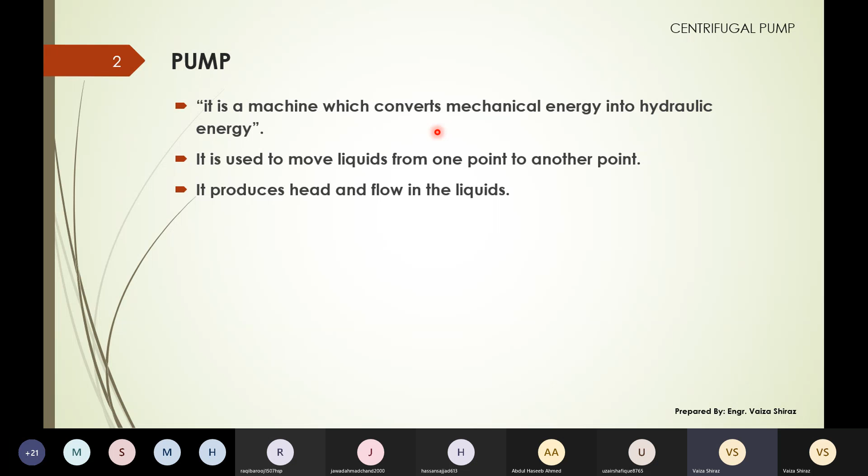So in that case you have to induce hydraulic energy in the water, and that is the main function of the pump. Now you have different types of pumps.

Commonly available pump types are centrifugal pump, reciprocating pump, turbine pump, submersible pump, pneumatic pump, rotary pump, screw pump, chain pump, and pump turbine. These are the 9 types of pumps which are available in the market.

I have already told you in the last lecture, in which we discussed the reciprocating pump, that out of these 9 types we are covering only the first 4 in this course. Of these, the first 2 types, centrifugal pump and reciprocating pump, will be discussed in detail, while turbine pump and submersible pump we will discuss briefly, just at the definition level.

In the last lecture we discussed the reciprocating pump in detail, and I also showed you the basic working concept of the turbine pump and submersible pump, so you can have the basic idea of these types as well. Today we will discuss the centrifugal pump in detail.

Now please make sure all pumps are doing conversions, converting mechanical energy into hydraulic energy. But the key factor for that conversion can be different, and more or less the name of every pump indicates that key factor contributing to the conversion of energies.

For example, last time we did the reciprocating pump, and we discussed that the reciprocating action is mainly responsible for converting the energies. That is why this pump is termed the reciprocating pump.

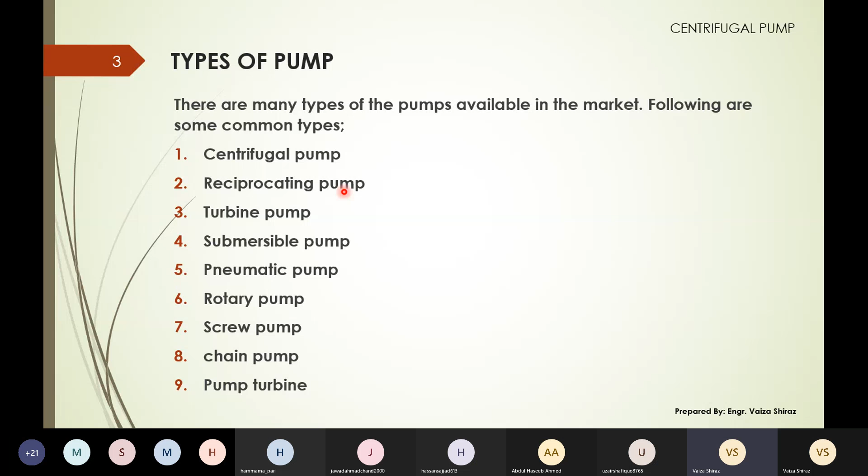So today we are discussing the centrifugal pump. By definition, it is a pump which converts mechanical energy into hydraulic energy by the action of centrifugal force, which is why it is termed the centrifugal pump. This force is produced by the rotation of the impeller.

Now this figure shows the typical casing of a centrifugal pump, and this cutout is made so you can see the inner arrangement as well. This red part is termed the impeller, this is the casing, this is the delivery pipe, and this is the suction side.

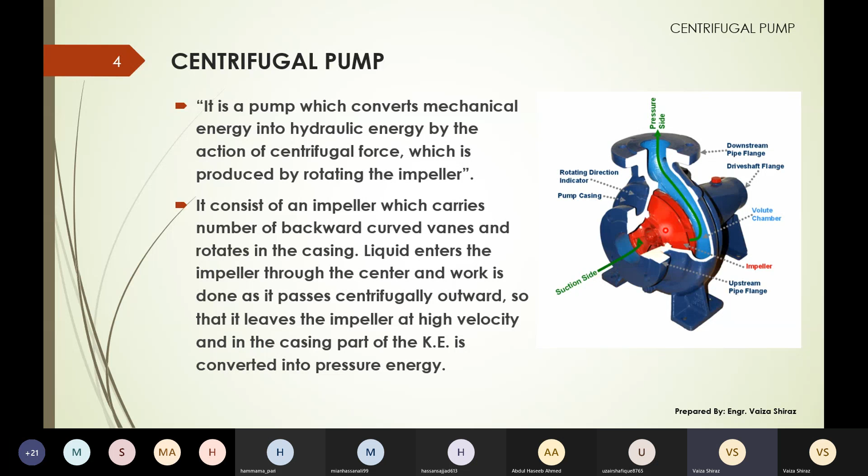Further, how it will do the conversion, I will clear this up with the help of the next slide, showing the main components of the centrifugal pump.

This pump mainly has three parts: the suction pipe, the main pump, and the delivery pipe. In these three main components, you have arrangements of other small components as well which facilitate the working of these main parts. I'll start with the first part, the suction pipe.

The first component on the suction pipe is the strainer. It will strain the incoming water to make sure that no solid particle enters the machine.

Then we have the foot valve. It is called the foot valve because it is present at the foot of the suction pipe. It will regulate the flow which is coming towards the suction pipe.

Then in the suction pipe, the pressure is negative. Water is basically sucked with this negative pressure, through which it is delivered from the underground reservoir to the machine. Then we have the suction flange, which is a connection between the suction pipe and the main pump.

Vacuum gauge, also termed the suction gauge, is a simple Bourdon gauge which is fitted on the suction side, and it will measure the negative pressure with which the water is entering the machine.

So if you see this layout, you can see that the suction pipe is delivering water at the center of the impeller or casing. The first step is to transfer the water from the underground reservoir, or from the low elevation reservoir, to the center of the impeller.

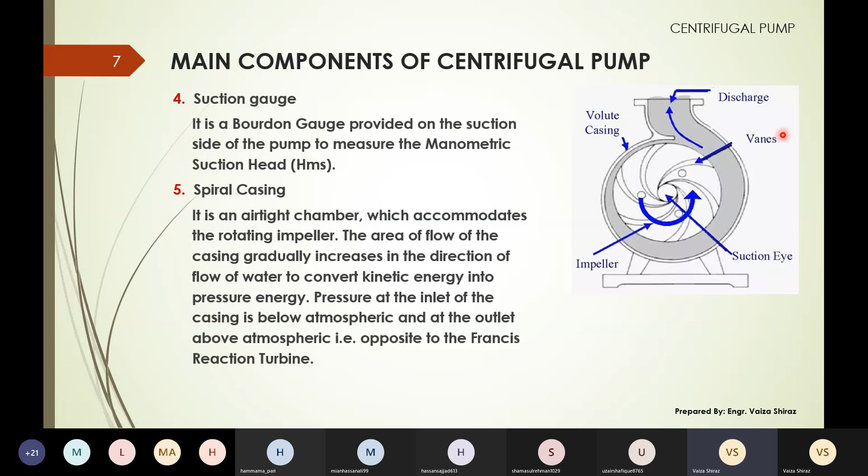One component was not visible in that figure, and that is the stuffing box. What is the stuffing box basically? If you see the figure again, you are connecting a shaft with the impeller which is enclosed in a casing - the rotating shaft passes through the casing and connects with the impeller. Now the shaft is a rotating component but the casing is a fixed component, it cannot move. So you need to properly seal this connection. Why do you need that? The reason is that if you allow shaft rotation, it means you have to keep some spacing in the casing around the shaft so rotation can happen easily. If you give open space in the casing, shaft rotation is maintained, but water will leak from there. You cannot maintain the pressure fully in the casing if there is even slight leakage. And if you give a completely firm connection, rotation of the shaft is not possible. So the sealing should be done in such a way that the rotation of the shaft is not affected, and there is also no leakage of water from the casing outside.

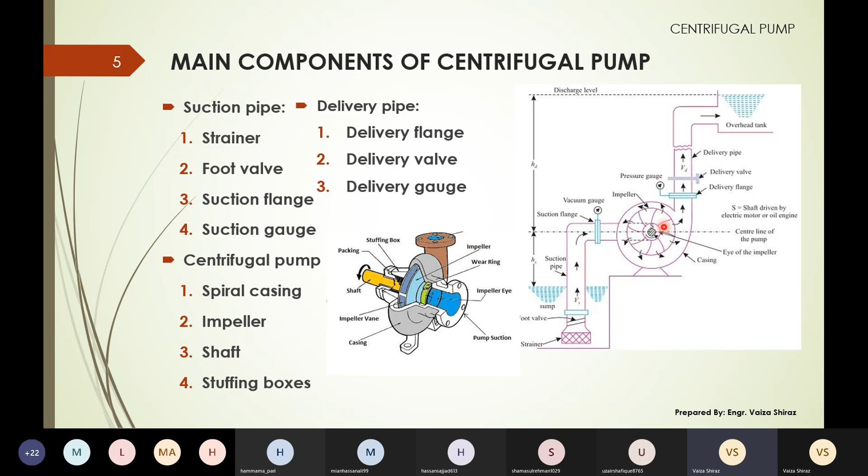For that, you use a stuffing box. A stuffing box is basically a box which will have the sealant material in it. This is the shaft of the machine, and over here you can see the stuffing box. In the stuffing box we will have the sealant material, which can be any material - usually it consists of jute strings along with grease.

तो उसको आप बेसिकली वो रस्सी है जिसको आपने ग्रीस में डिप किया हुआ है, उसको आप उस कनेक्शन पे बिल्कुल रैप कर देते हैं, उससे रोटेशंस भी इफेक्ट नहीं होंगी, और ये लीकेज के चांसेस को भी रिड्यूस करेगा।

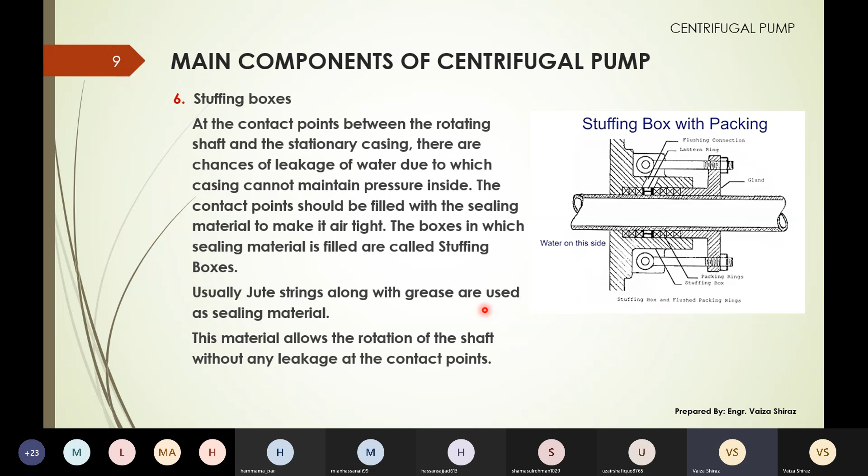Okay, next is shaft. इसमें अब एक और कंपोनेंट है जो अभी तक हमने डिस्कस नहीं किया, that is priming funnel. इट इज बेसिकली यूज्ड फॉर द प्राइमिंग ऑफ द मशीन. व्हाट इज प्राइमिंग? आई विल डिस्कस दैट इन द नेक्स्ट स्लाइड्स.

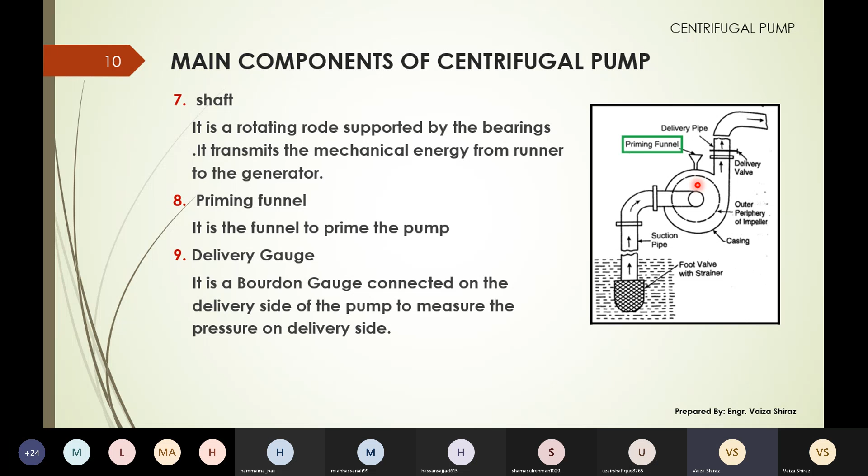Okay, now types of the casings of the centrifugal pump. You have three basic types. The first type is a simple spiral casing, which is also termed as volute casing. In this casing, the area of the flow gradually increases in the direction of the flow, which converts the kinetic energy into the pressure energy. In this casing, there will be eddy formation which causes the loss of the energy. Now this can be overcome by the modification in this casing.

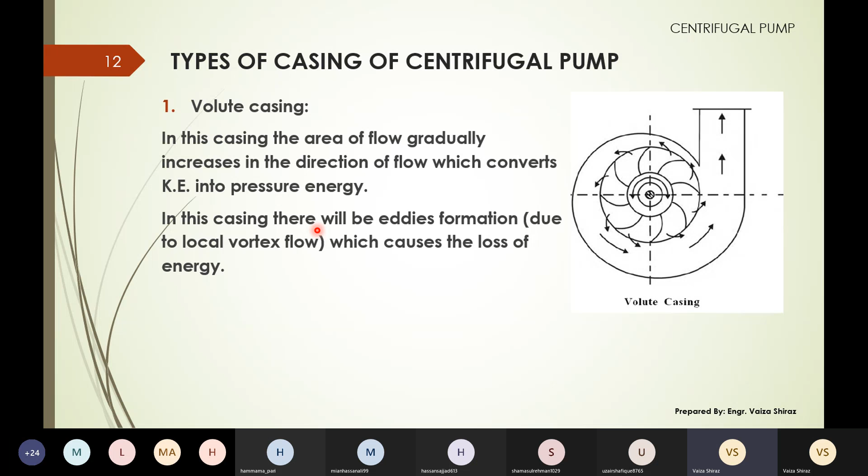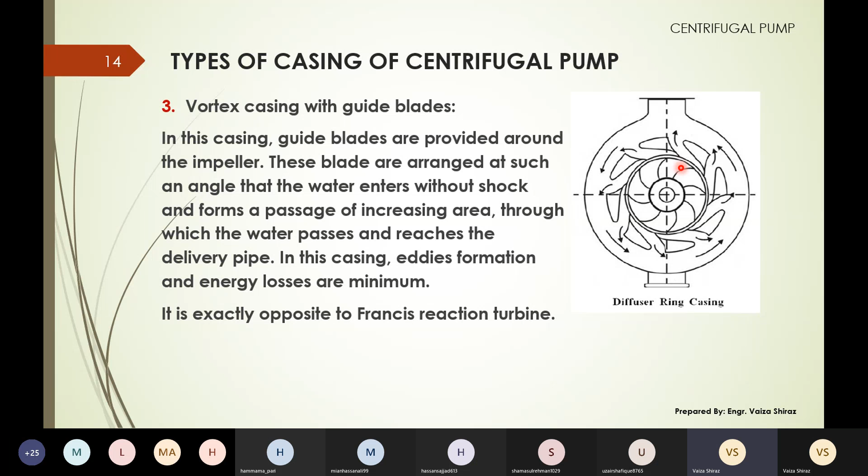Then we have the vortex casing with the guide blades. In this casing, guide blades are provided around the impeller. These blades are arranged at such an angle that the water enters without shock and forms a passage of increasing area, through which the water passes and reaches the delivery pipe. In this casing, the eddy formation and energy losses are very less. It is exactly opposite to the Francis reaction turbine in terms of the layout of the components.

Okay, next topic is regarding the manometric head. It is the head which is developed by the pump and it is measured by the Bourdon gauge provided on the suction and on the delivery side. So HS is the static suction lift and HD is the static delivery lift. अब इसमें कुछ losses भी हैं.

You always have the frictional losses in the pipe. So HFS is the friction head loss in the suction pipe, it is FLVS square by 2GD, and HFD is the frictional head loss in the delivery pipe, it is FLVD square by 2GD. The velocity head at the suction and delivery pipe is given as VS square by 2G and VD square by 2G.

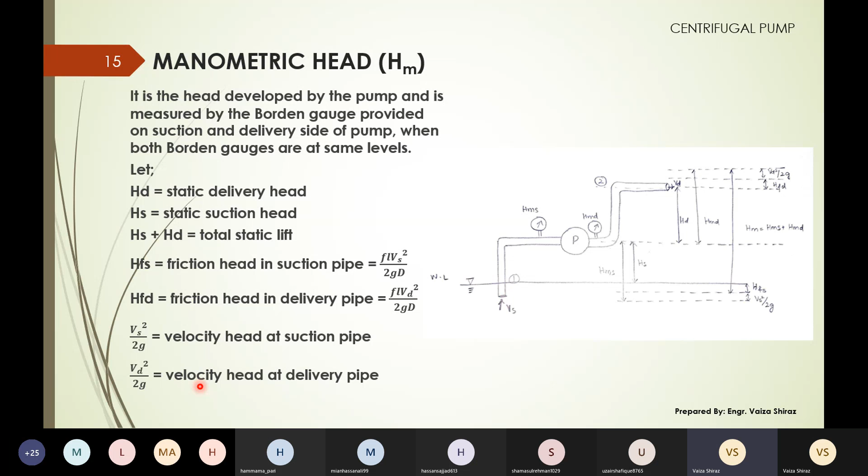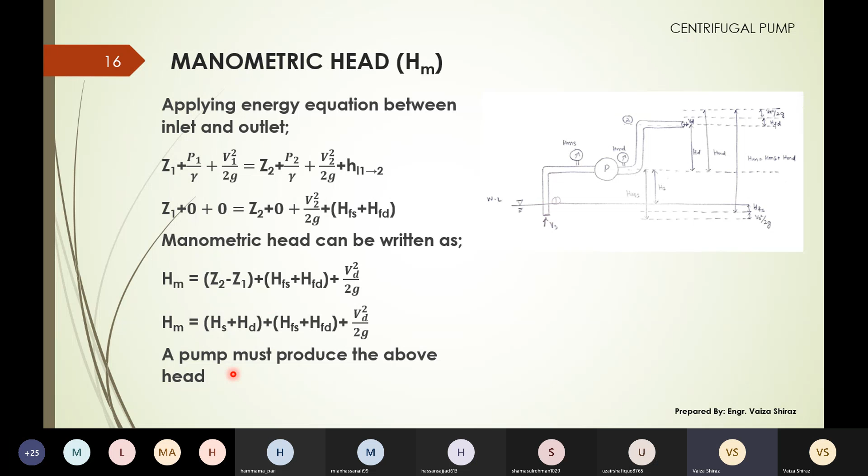Find out the equation for HM. For that, you will apply the energy equation between section 1 and section 2. Just apply the equation and simplify this. This is your equation for HM. This is the minimum head which a pump must produce. HM है manometric head.

Further, you can also define HMS and HMD separately. HMS is the manometric suction head. It is the head which is developed by the pump on the suction side, and it is measured by the Bourdon gauge on the suction side. That is, HMS is HS plus HFS plus VS square by 2G. Total जो manometric head है।

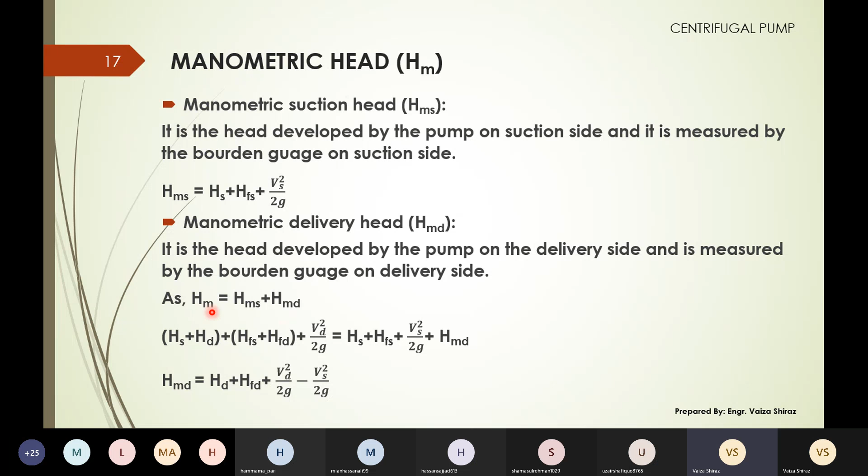Similarly, the manometric head on the delivery side can be computed by this basic equation, that HM is the summation of suction and delivery manometric head. You know the equation for HM, you know HMS, simplify the equation to get the equation for HMD. It is used in the design of the pump when we know about the total static head. तो आप इसको design में use करते हैं pumps के।

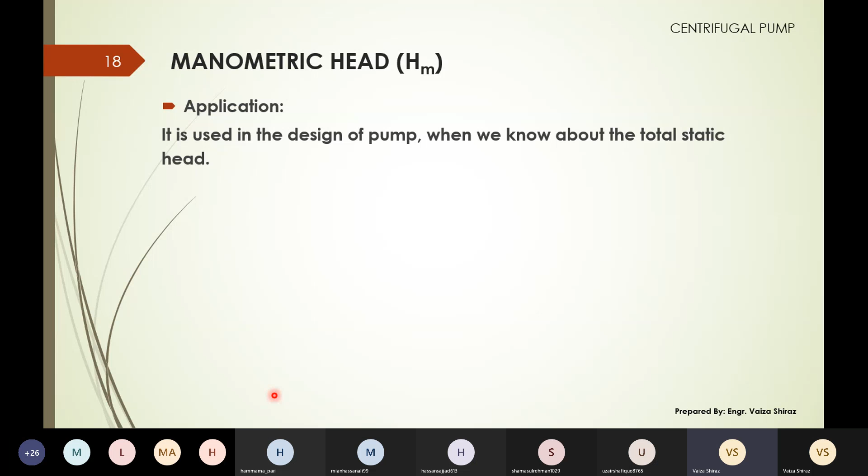The next is the work done by the centrifugal pump, and this is on the similar basis as you have already done in the previous topics. आप लोगों ने एक blade consider की है impeller की, and you will draw the velocity triangle at the inlet and outlet tip, made particular for the centrifugal pump. In this case, beta 1 is 90 degree, which will make VW1 as 0. तो जो आपकी बेसिक ट्राइंगल है वो इस फॉर्मेट में रिड्यूस हो गई है by putting beta 1 as 90 degree. Remaining all the steps and all the parameters are same.

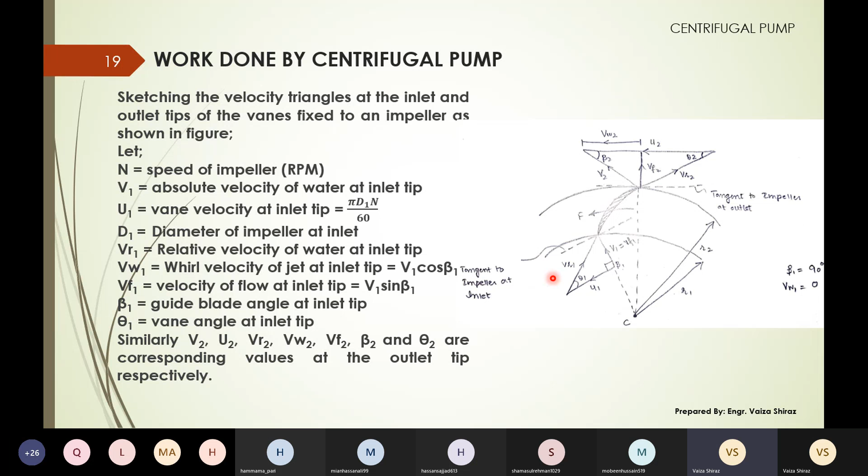Okay, so on the similar basis you will find out, by applying the impulse momentum equation along the x direction, that is rho Q VW2.

In this case, the difference is that all the other steps are the same, you still have to find efficiency. The only difference is that in the case of the turbine, the energy developed in the water was the input energy, and the impeller's rotation was the output energy. But in this case, the rotation of the impeller is the input energy, and the energy induced in the water is the output energy, that is the output power. So this is the only difference here.

So this work done per weight by the impeller is the input energy, and this work done per weight supplied is produced by the pump. This is the head developed in the pump, so this is the output energy. In the equation for efficiency, this is the output and this is the input, and their ratio gives you the theoretical hydraulic efficiency of the centrifugal pump. This is the only difference, remaining all steps are basically the same.

Now we will discuss what is priming. It is the process of filling water from the foot valve to the delivery valve, including the main pump casing. It has to fill three parts: the suction pipe, delivery pipe, and the main pump.

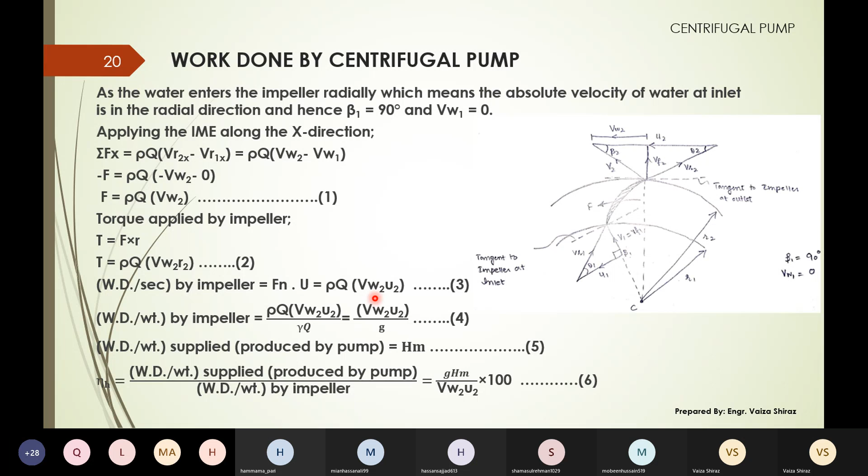So it is rho Q VW2 U2. Now in this case, rho is the density of the fluid. If you are using water, the density is 1000 kg per meter cube, but if you are using air, it will be 1. So it means that you are reducing the result of this equation by 1000 times if you are replacing water with air.

This is why you should not run the machine dry. It should always be initially filled with water, and for that you can use any external means. Usually it can be done by a small reciprocating pump which will fill the water in the machine, and then it can be turned on to further run the cycle.

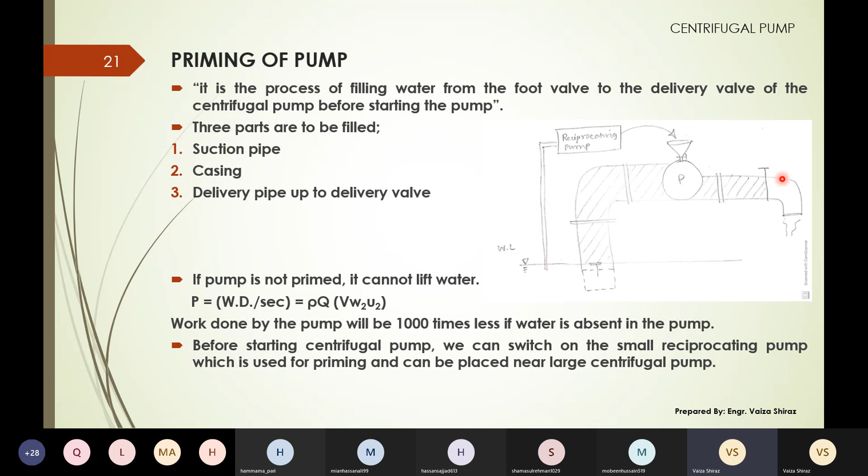Next we have the efficiencies of the centrifugal pump. The first one is the manometric efficiency. It is the ratio of the manometric head to the energy supplied by the impeller, so it is this ratio. This efficiency you found earlier in the derivation, that is the manometric efficiency or the hydraulic efficiency.

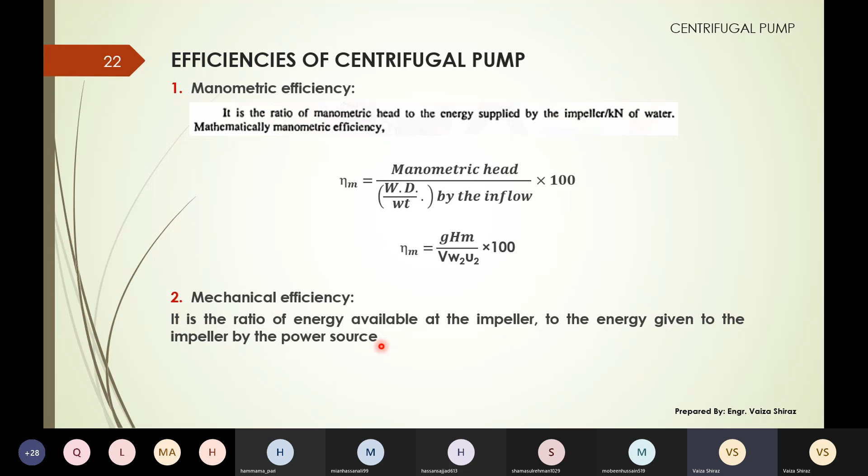Then the mechanical efficiency. It is the ratio of the energy available at the impeller to the energy given to the impeller by the power source. This decides how much rotation is transferred from the motor output to the shaft as the input to the impeller. Overall efficiency is basically the ratio of P naught and P input, so this is the equation.

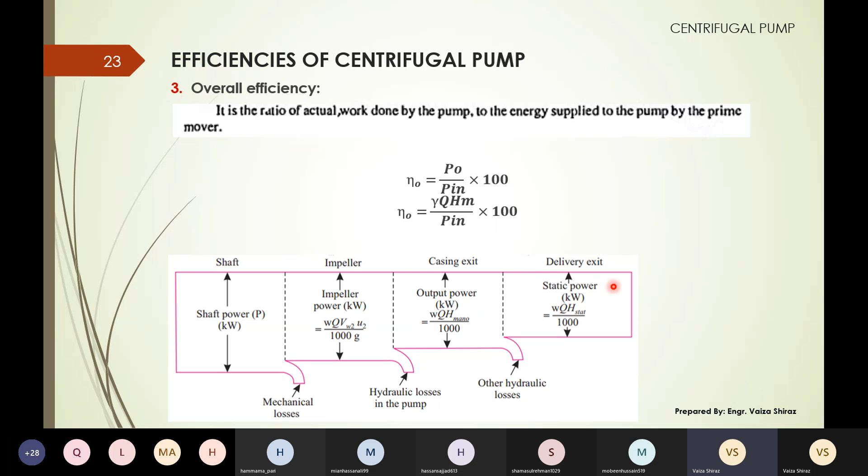Further, I have attached this figure which will give you the idea about different losses in the machine. We have always discussed the mechanical and hydraulic losses, but you can also have losses at the exit of the casing, and also losses at the delivery point as well.

Next is discharge through the impeller. Find out D1 and D2, the diameters, and VF1, B1, the velocity of flow at the inlet tip and width of the wheel at the inlet. You have to write down the equation for the discharge, on the similar basis as done for the reaction turbine in the last lecture.

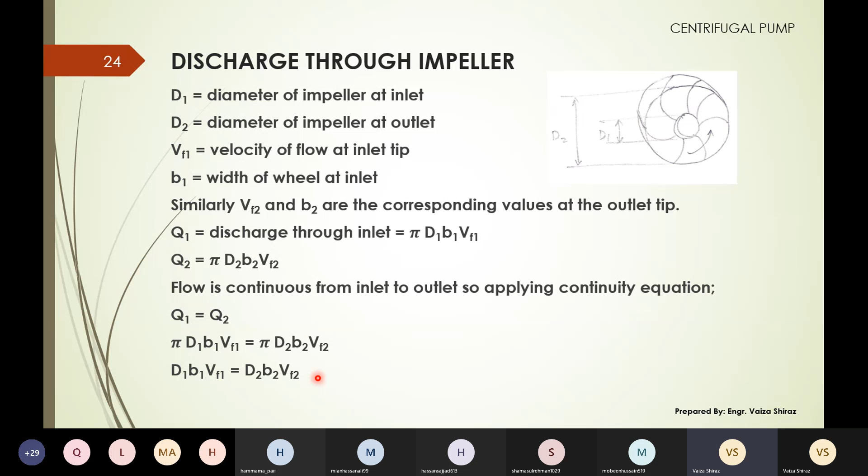Equation of continuity will be applied. The discharge at the inlet and outlet sections will be same, so Q1 equals Q2. Q1 is pi D1 B1 VF1, and Q2 is pi D2 B2 VF2. This can be further simplified and used in the design to find out the remaining parameters of the machine.

Next is pumps in series and pumps in parallel. What will happen if you attach the pumps in series, or if you attach pumps in parallel - what will be the effect on the discharge and on the head? That we will discuss now.

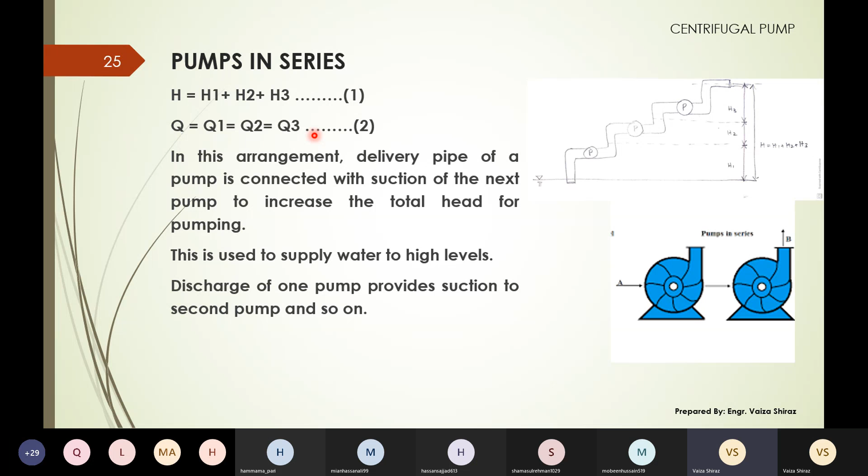When attaching pumps in series, the delivery pipe of the first pump acts as a suction pipe for the second pump. Similarly, the delivery pipe of the second pump acts as the suction pipe for the third pump. This raises the pressure head, but the discharge remains same. So if you want to increase the water head while keeping the discharge constant, you can attach pumps in series, which will raise the head equivalently.

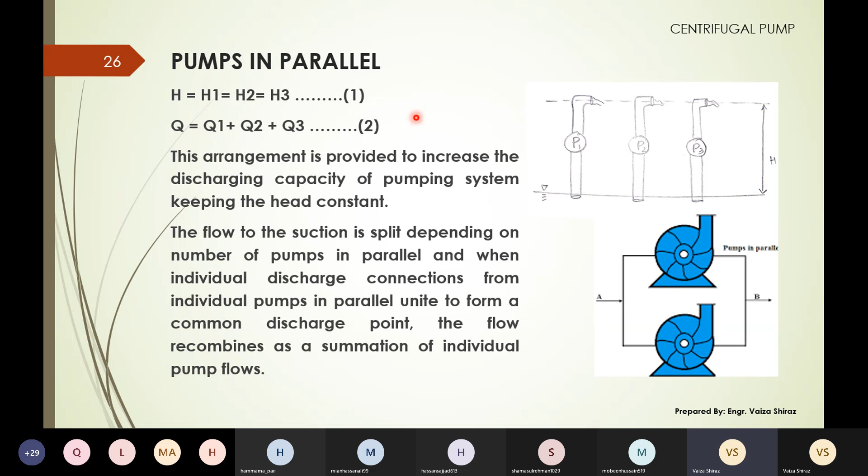But if the pumps are attached in parallel, it will not raise the head - in fact it will increase our discharge. So in this case, the discharge is increased, but the head remains same. Depending upon the requirement, you can arrange them in series or in parallel as per the need of the yard.

Next is the shut-off head. It is the maximum head developed by the centrifugal pump when the delivery valve is completely closed and the pump is in operation. It is the maximum head which is produced by the pump.

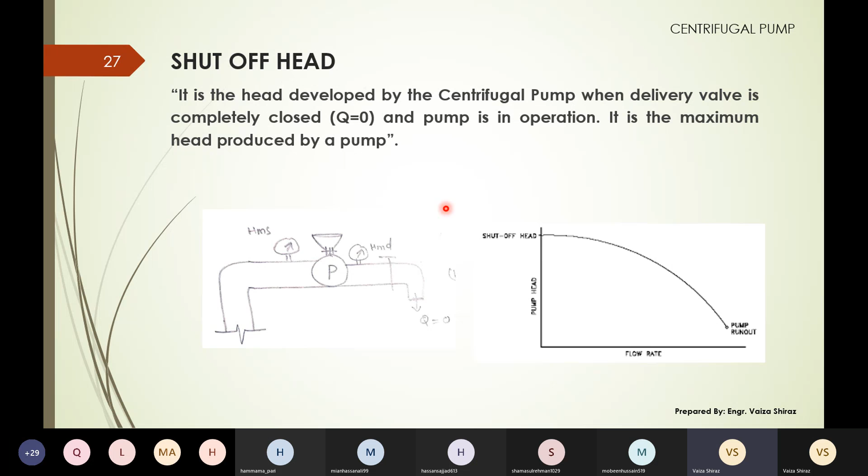Next is specific speed of the pump. We have also discussed the formula for the specific speed of the turbine. The derivation of these relations is not in the content of this course - we will not cover derivations, but we will definitely cover their formulas. Please make sure you remember the formula for the specific speed of the pump as well: N square root of Q over Hm raised to power 3 by 4.

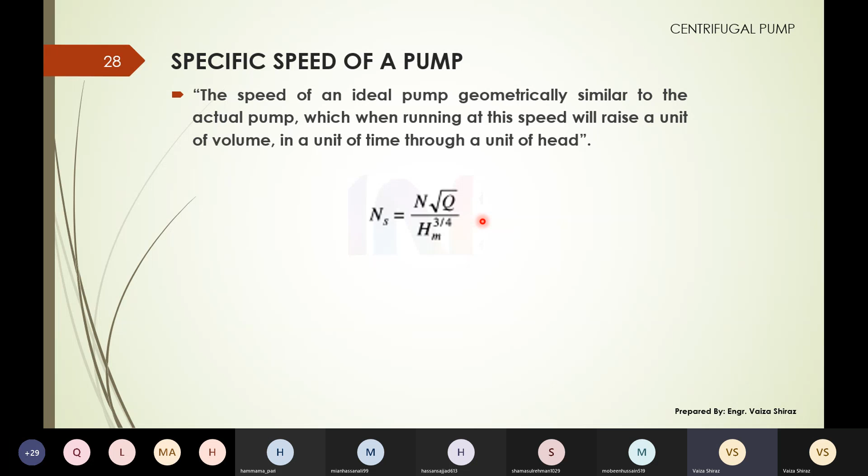Now next is classification of the centrifugal pump. It can be done on three bases: based upon the casing, based upon the stage, and based upon the suction. Based upon the casing, it can be volute or spiral casing, vortex casing, and vortex casing with guide vanes - we have already discussed the difference between these three types. Now the next classification is based upon the stage and based upon the suction, so we'll discuss these two one by one.

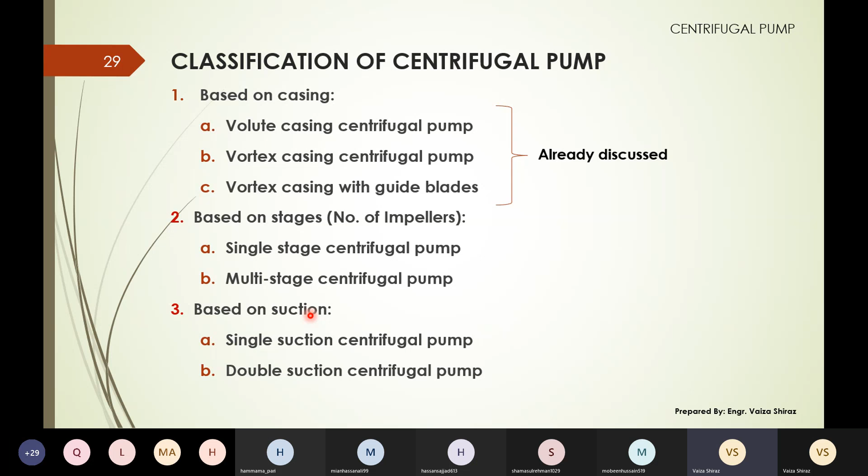Now, what is a stage? Stage means number of impellers. You can always have more than one impeller in the same casing, attached on the same shaft. What is its advantage? If you have more requirement of elevation difference, if you need to induce more energy into the water, for that you can increase the number of impellers.

Water will complete its cycle around one impeller and then move to the second impeller. So the number of times it completes the cycle around the impeller, that many times hydraulic energy is induced into it. That is the difference between a single-stage and a multi-stage centrifugal pump. In the single stage, you have only one impeller on the shaft, while in the multi-stage, you have more than one impeller on the shaft.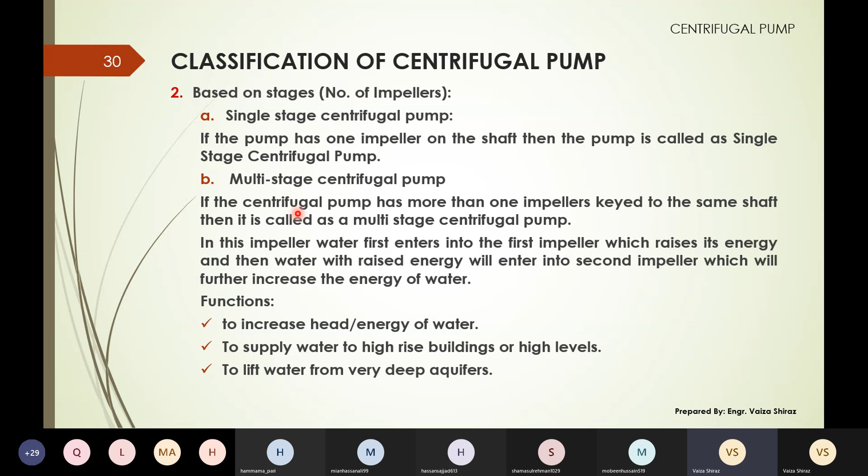Multi-stage obviously has more capacity for inducing pressure head in the water compared to the single stage. So depending upon the requirement in the field or wherever you have to install the machine, you can increase the number of impellers as well.

Next is classification based upon suction. This tells you how many ways water can enter the impeller of the machine. In a single suction centrifugal pump, there is only one inlet for water to enter the impeller, while in a double suction pump, both sides of the impeller act as inlets for water. So in this case, the discharging capacity is more for this pump as compared to the single suction pump.

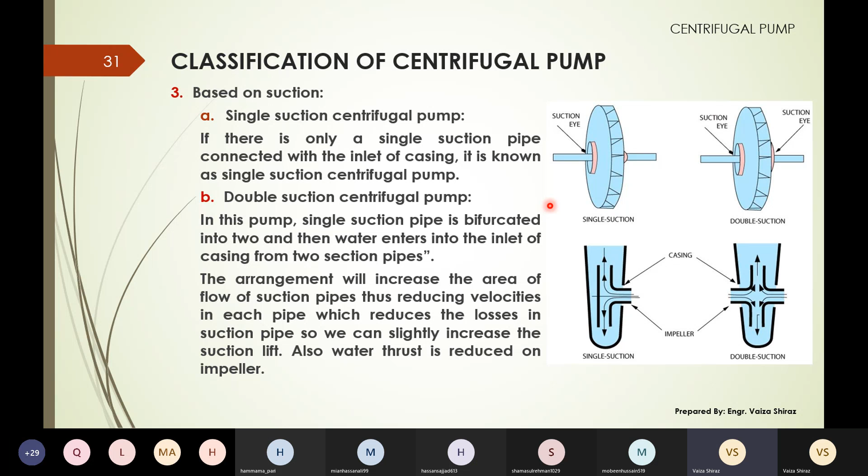So rearrange the equation — this is your equation for HS maximum. This equation means that when your P2...

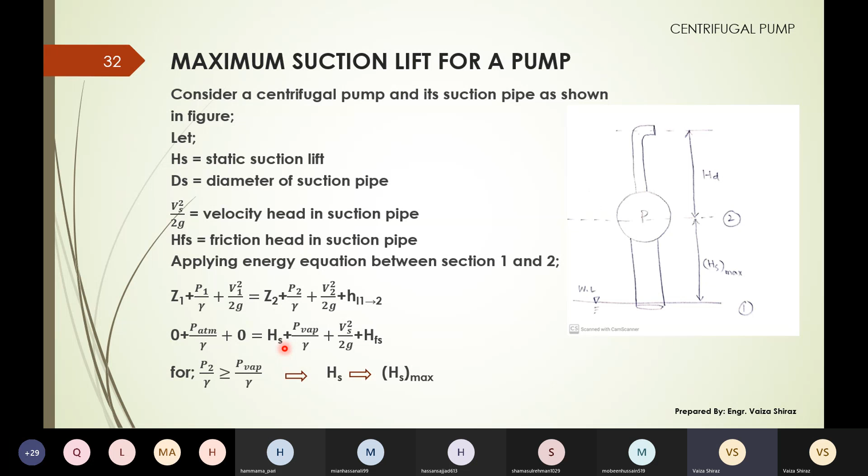So it means that when P2, the pressure at section 2, is more than or equal to the vapor pressure of the liquid, in that case this HS will become HS maximum. Now here you replace P2 with P vapor, and HS will become HS maximum. Rearrange the equation to find out HS maximum — this is the equation for HS maximum.

Now it shows that HS maximum should always be less than 33.9 feet of water. The reason is that HS maximum is the atmospheric pressure in terms of head minus the whole parameter in the bracket. What is atmospheric pressure in terms of head? That is 33.9 feet of water. So it means HS maximum will always be less than this head of atmospheric pressure.

Practically, it can vary from 28 feet to 30 feet. Now the factors affecting the maximum suction lift are atmospheric pressure, vapor pressure of the liquid, friction in the suction pipe, and velocity head in the suction pipe.

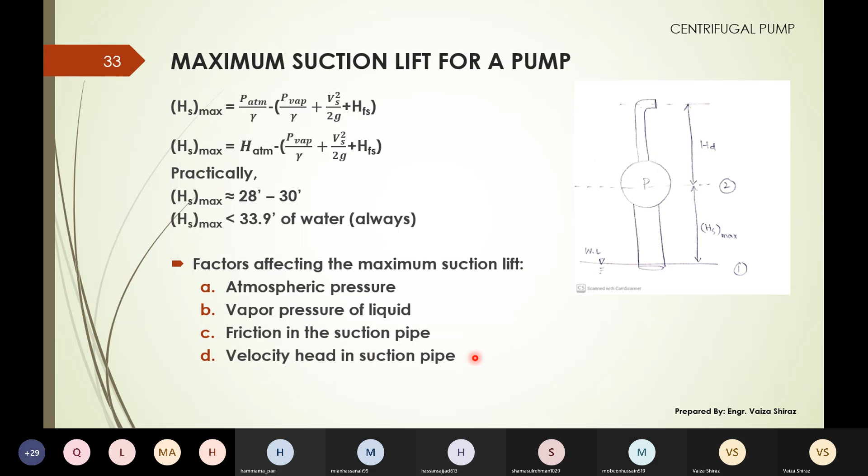Now we'll see some numerical problems regarding the maximum suction lift, HS maximum. This is the basic equation — you just have to find out all the parameters for it. For that, you need to convert the vapor pressure and atmospheric pressure into equivalent heads, that is by P by gamma, so these are in terms of meters of water. Put the remaining values in the equation to get HS maximum.

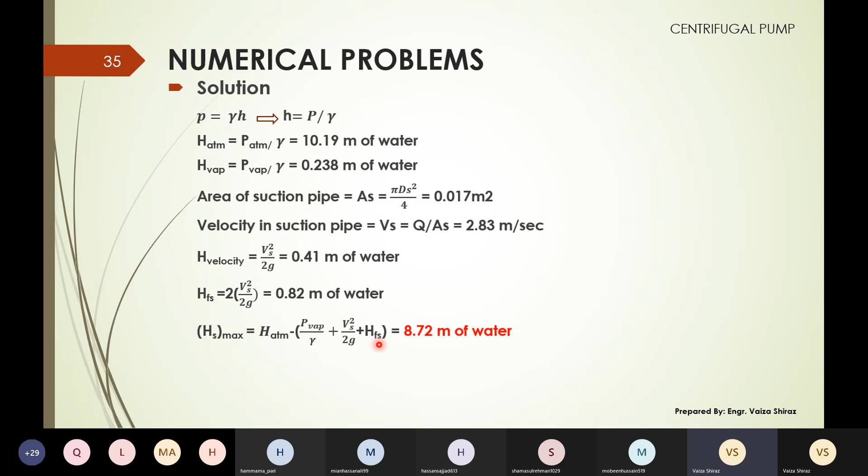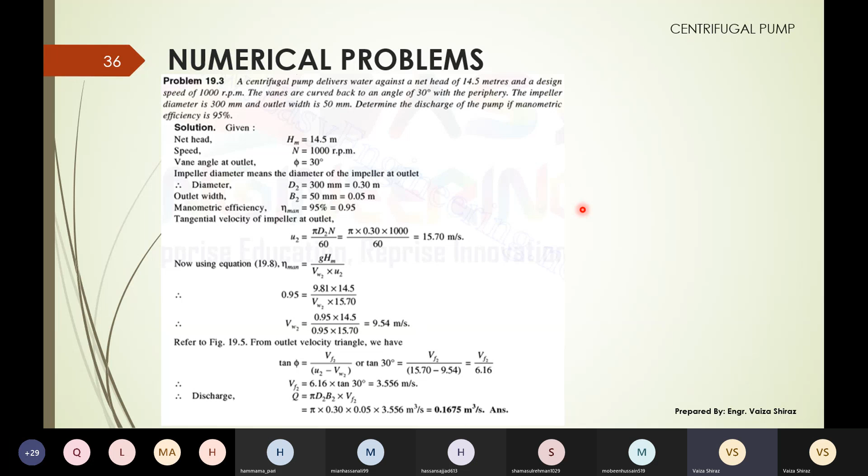I have attached two to three more problems of different types which you can have in your assignment sheet or deal with in CP. Just go through with these; a detailed solution is attached in the slides. They are quite easy, so it will not be difficult for you to understand them.